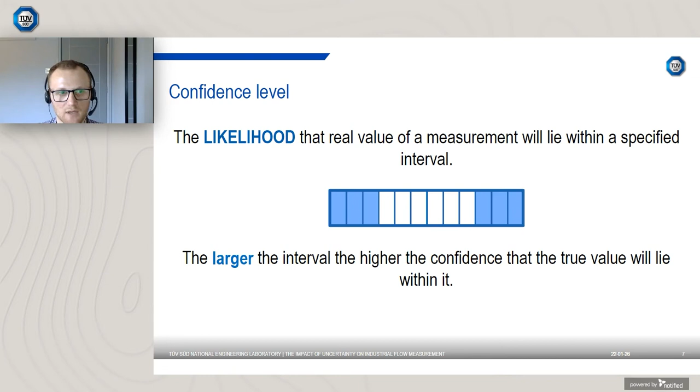So when you state a result, there are three things you must state. You must state the measured value, so that is the output — whether it be from your scale, stopwatch, or flow meter — the associated uncertainty alongside this, as well as the confidence level. So, as it says here, the result of a flow measurement may be stated as 3.5 plus or minus 0.2 litres per second at a 95% confidence level.

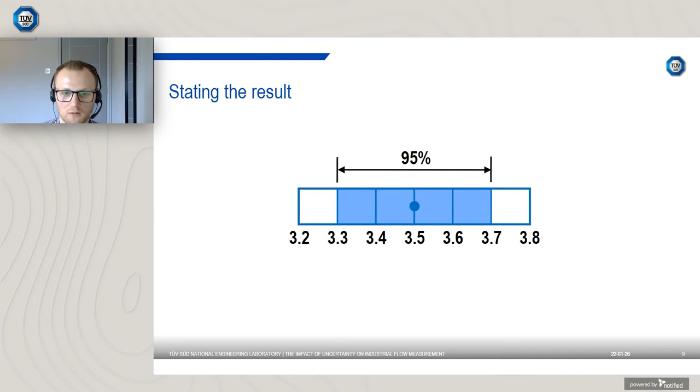So what does this mean in practice? Your measurement is 3.5, but based on the uncertainty, there's a 95% chance that the true value will lie between 3.3 and 3.7.

Error is another term that's commonly used, and this is the difference between the true value and the measured result. Because we don't know the true value, the error will be unknown. You do see error values stated from time to time, and this is when you're comparing a device under test to a very accurate reference instrument that is very close to the true value. So you're comparing a result to a value that is very close to the true value, and at times you can see error values stated in that sense.

Accuracy is another term that's used when dealing with uncertainty, and this is defined as the closeness of agreement between the result and the true value.

You can have an accurate measurement with a large uncertainty, so in a sense you can almost strike lucky with a particular measurement and be close to the true value. But importantly, you cannot attach a value to accuracy.

You can describe something as being highly accurate, very accurate, or compare two instruments and say this instrument is more accurate than the other. But when you start talking about values, that is an uncertainty, and you need to quote the appropriate confidence level with it. Accuracy is a qualitative term, not a quantitative term.

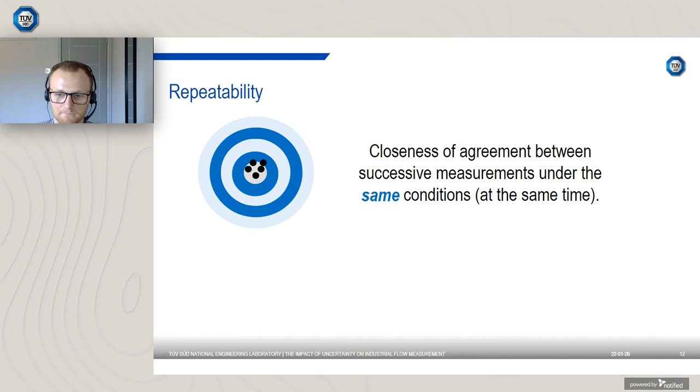If you have an accurate instrument, if you've got good accuracy, it ultimately means you've got good repeatability, because to be accurate, you need to be consistently close to the true value. So to be consistently close to the true value, you need to have a repeatable instrument.

If you have poor repeatability, you ultimately have poor accuracy. In a sense, you may strike lucky and be close to the true value with a measurement, but the poor repeatability of the instrument means you'll not always be close to the true value.

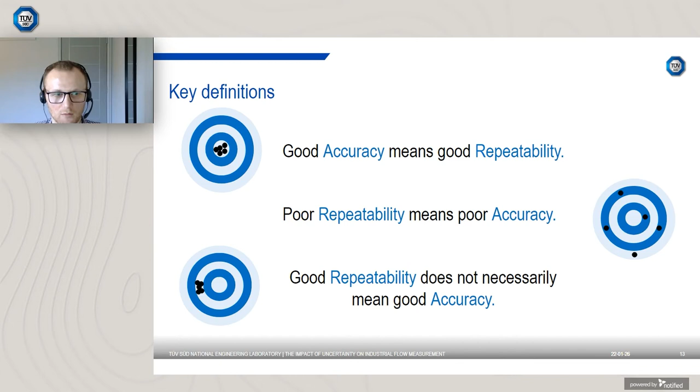And the final point: good repeatability does not necessarily mean you'll have good accuracy. You could have a lot of measurements gathered around the same point, but they may not be close to the true value.

Bias is another term commonly used, and this is when every measurement is affected in the same way. This could be, again, a flow meter which over or under reads by the same amount each time, or weigh scales over or under reading, and things such as that.

You can correct for bias, but you need to consider the uncertainty in your correction.

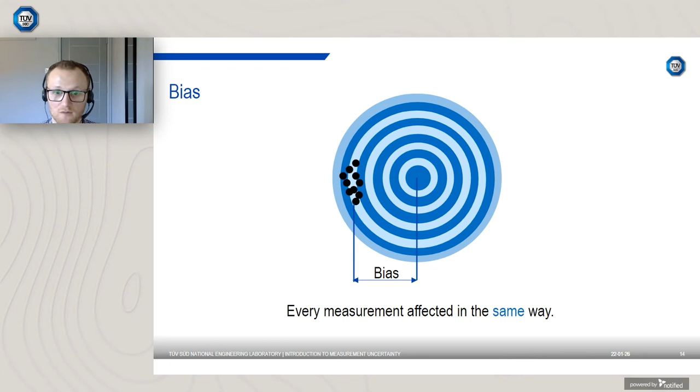Next will be the cost of errors, to emphasise why we care about uncertainty and why it's important in an industrial sense.

In 2019, there were an average of 81 million barrels of oil produced per day in the world at a total cost of 5.19 billion. If you assume an uncertainty of 0.25%, this leads to a financial exposure of £13 million per day.

This shows essentially why uncertainty in this sense is important. It's important that people have confidence in what they can pay for, as well as governments, to ensure that they're getting the appropriate tax revenues. So low uncertainty flow measurement in this case is very important.

A more practical example: if you look at petrol stations and refilling a car. If there's a 2% uncertainty on the flow meter at the petrol station and you have a 50-litre tank, your uncertainty in filling the tank would be 50 plus or minus 1 litre at a 95% confidence level.

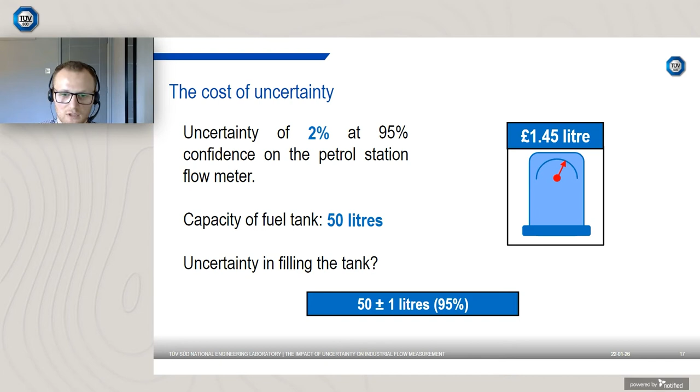If we consider £1.45 per litre and consider it financially, the cost of filling your tank would be £72.50 plus or minus £1.45 at a 95% confidence level.

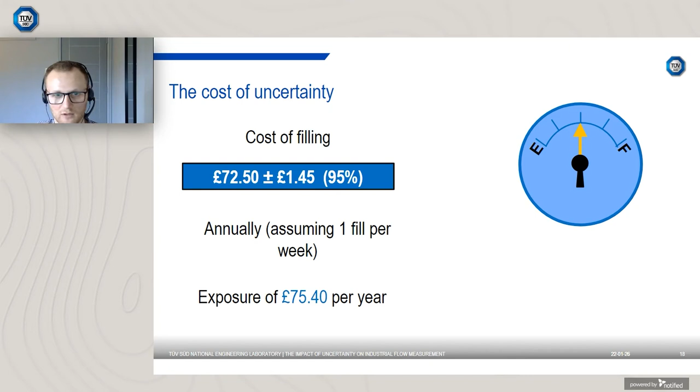If we take it a step further and assume you fill your car once per week, over the year you can be exposed to £75.40, either you the consumer, or the petrol station itself. And this is only with a 2% uncertainty. It is achievable, but you don't want to have 5-10% uncertainty on things like that, because that can really lead to exposures for the consumer.

So the next bit we'll talk about the types of uncertainty. I've quoted a few uncertainties and a number of examples, and in this section we'll really help us understand where we get the uncertainty values from, and then ultimately the final two sections will allow us to do some calculations of our own and understand where these values come from.

In terms of categories, they can be broadly defined into type A or type B in uncertainty analysis. Type A is using real data, so it's using statistical data and generating an uncertainty value via that data. Type B is generally non-statistical methods, so it may be from a manufacturer specification sheet, with manufacturing tolerances, or a calibration certificate where an uncertainty is quoted on it, or it may be just from judgment itself.

But first of all, we will look at type A uncertainties. So type A analysis is generally analysis of repeat measurements. When we repeat a measurement, it reduces the chance of errors, but repeats never agree. So subsequently, how do we decide which values to use, and what does the variation tell us?

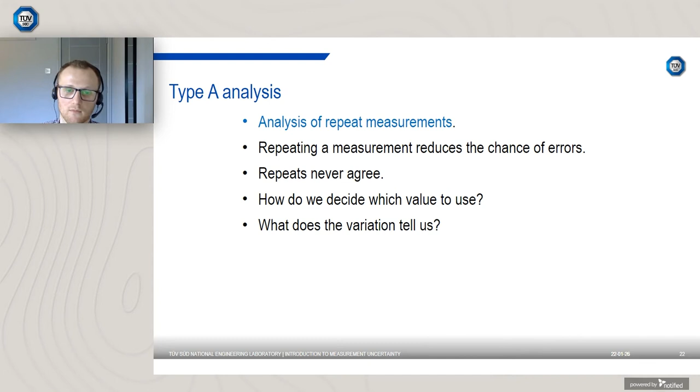Best estimate of a true value. If we want to get the best estimate of a true value and we have a number of points, the best estimate would be the average of all these points.

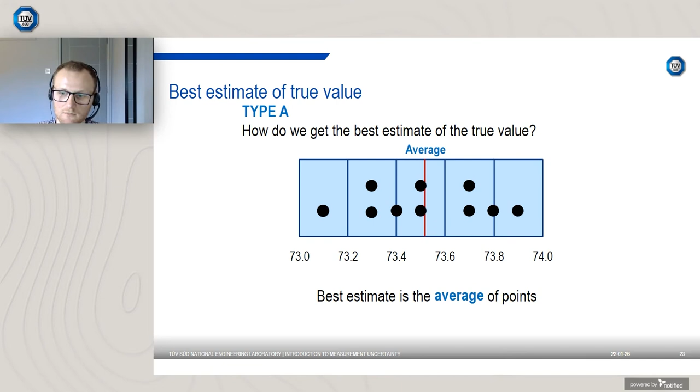But if we want to go a step further and determine how spread out the values are, we could use the range. You would subtract the lowest value from the highest value. But what this doesn't do is characterize what's going on in the middle, and it ignores 8 of the 10 data points.

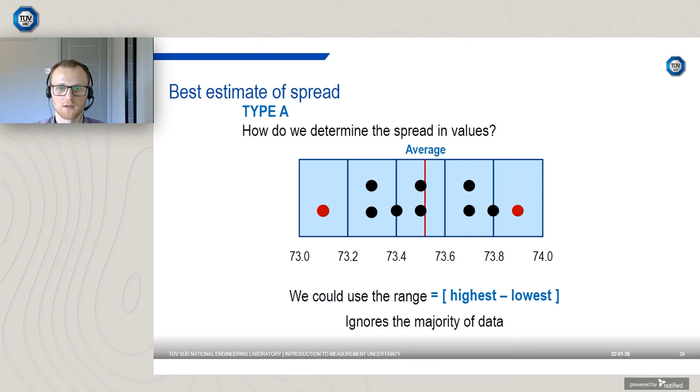So standard deviation is a measure of how essentially spread out the values are, and we can use an example to calculate a standard deviation. So if we have 10 readings for a flow of oil, shown below, we've got various readings between 73.1 and 73.9.

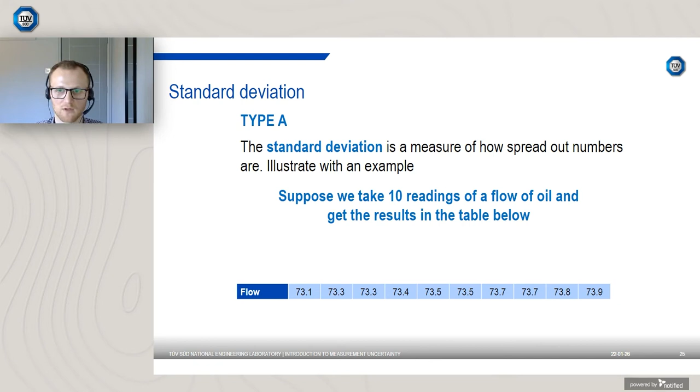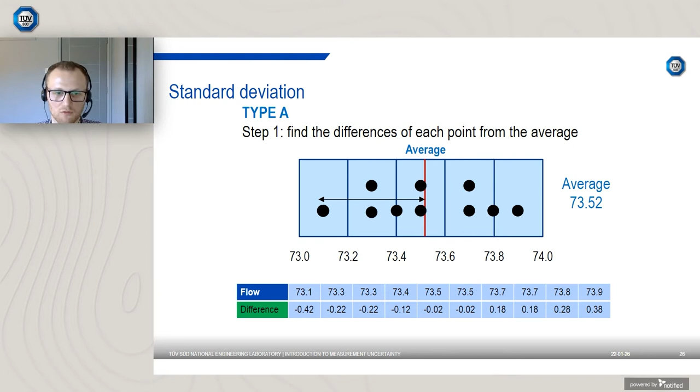Our first step in calculating the standard deviation is calculating the average of each of those points. And the average for each of those 10 points is 73.52. The next step is subtracting the average value from each of the 10 flow values, and this gives us a difference, 10 differences.

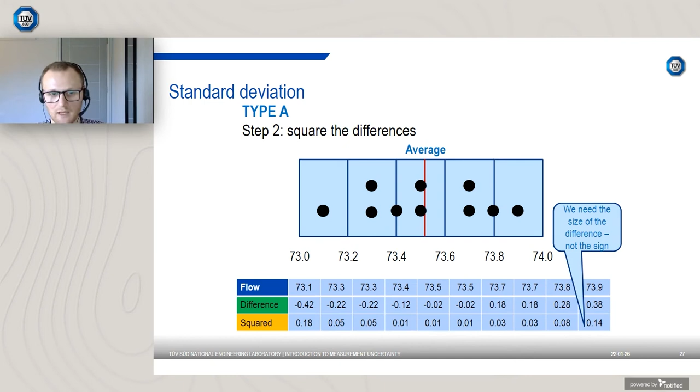We then square each of those values, so we have 10 squared values of the differences. And then we subsequently sum each of those 10 values together.

We then take an average of those 10 values, but in this instance we divide by 9 as opposed to 10, to get an answer of 0.064, and I'll go on to explain on the next slide why that is.

So we have an x bar, and we've set that as our average, and for each of the 10 values for xi, we've calculated the difference, we've squared the difference, we've added the 10 differences together, we've divided by n minus 1.

The reason we have divided by n minus 1 as opposed to n: if you divide by n, you're only calculating the standard deviation of that sample of 10. But what we are trying to do with our standard deviation is characterize what the spread would be in an infinite number of data points. And to do this, we divide by n minus 1.

This actually increases the standard deviation slightly. It accounts for the fact that we don't have the full population of data available to us, and errs on the side of caution by increasing the standard deviation slightly.

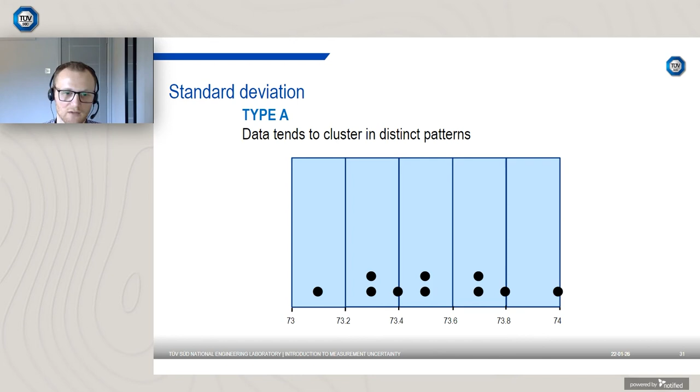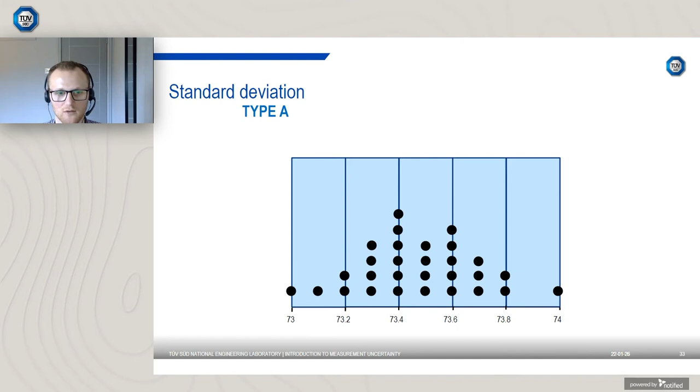So standard deviation - we've got 10 data points, but if we began to gather more data points, what you generally see for most things in nature and life, so if you think about people's weight, people's height, various other things, data tends to cluster in distinct patterns. And as you gather more data, you can see a pattern starting to emerge.

So you get this characteristic bell-shaped, or Gaussian, or normal distribution curve, where you can see that most points are centered around the average, and as you get to the extremes, the frequency of the readings decreases.

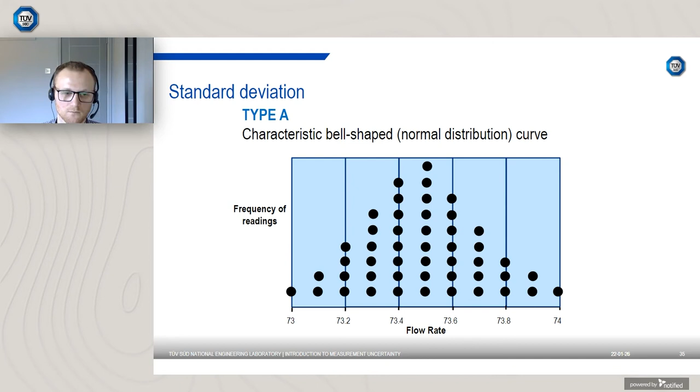So what does this tell us? The standard uncertainty, or small u, is equivalent to the standard deviation. So the likelihood of finding the true value in this interval is 68%, or 68.27% to be more accurate.

68% - this comes from a mathematical derivation from the cumulative distribution function, but I wouldn't concern yourself necessarily with why it ends up at 68. The previous calculation of 0.253 using the data set we had essentially characterizes that, if we had a full sample, an infinite sample of flow values, approximately 68% of the values would fall within this range.

Specifically, between 73.52 minus 0.253 up to 73.52 plus 0.253. If the values were more spread out in our sample of 10 flow rates, you would essentially see a flattening of the curve - it would be flatter with a smaller peak, and the standard deviation would be larger.

So essentially, the standard deviation for a normal distribution characterizes how tall or short or wide the shape of this normal distribution curve is. And that makes sense. If you've got a large standard deviation, the values are more spread out, and your curve is going to be flatter. Whereas if all the values are closely grouped around the average, you're going to have a taller peak, a lower standard deviation, and more of the values will be close to this peak.

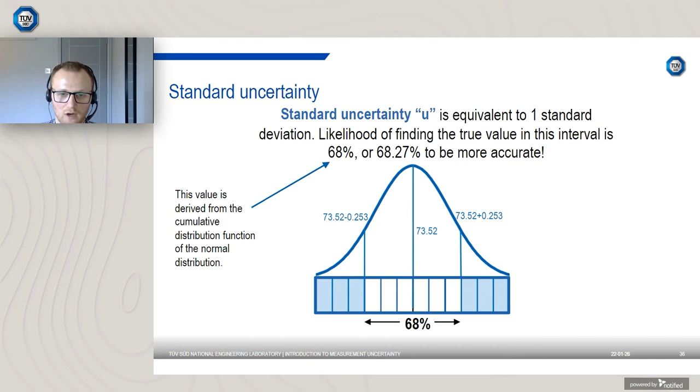So expanded uncertainty is a term that's used as opposed to standard uncertainty, and this is the uncertainty at a different confidence level. Our standard uncertainty is at a 68% confidence level, so we have 68% confidence that the true value will lie within plus or minus 1 standard deviation. But if we want more confidence that the true value will lie within the interval, you need to multiply the standard deviation of 0.253 by 1.96, and this increases our confidence level to 95%.

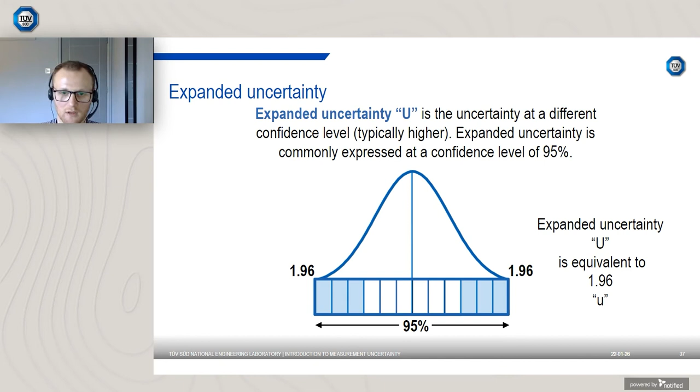And this is illustrated here. So we've got our 68% confidence level at a coverage factor of 1. If we want to increase the confidence that the true value will lie within here, we essentially multiply by the appropriate coverage factor, and that widens the uncertainty bands, and you can see it's collecting more data. There's more data within the two coloured lines, and essentially it's increasing our confidence that the true value will be within there.

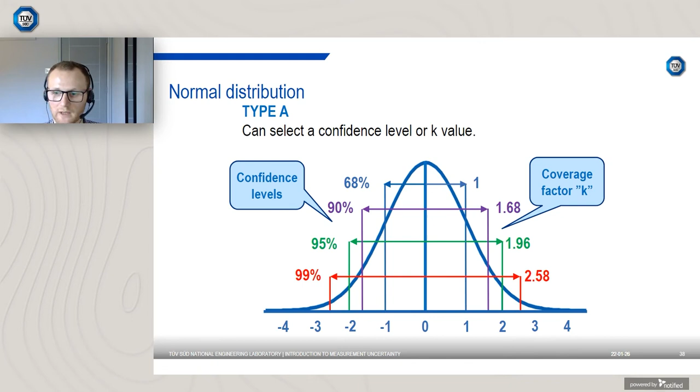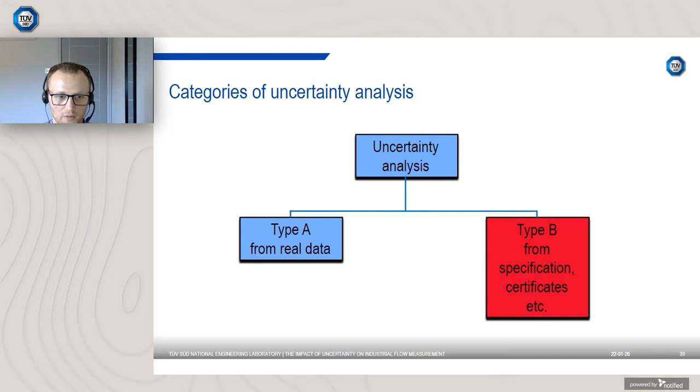So we've talked about type A, generally around statistical analysis of a number of points, getting our standard deviation, and then subsequently our standard uncertainty based on that. Sometimes we don't have a wealth of data available to us, and this is actually quite common. So this is where type B comes in. So what do we do?

As it says here, not all uncertainty comes from type A analysis, and often you need to assess uncertainty from other sources. That may be using your own judgment. You might know that the true value will lie between two values. There may be manufacturer's data, so they may quote that something is manufactured to a given tolerance, so it will be between two values. You may have an item calibrated somewhere else, such as reference temperature or pressure instrumentation, and it's come with a certificate saying the uncertainty is X at a confidence level of Y. You're essentially just taking the uncertainty information that you have been given and applying it.

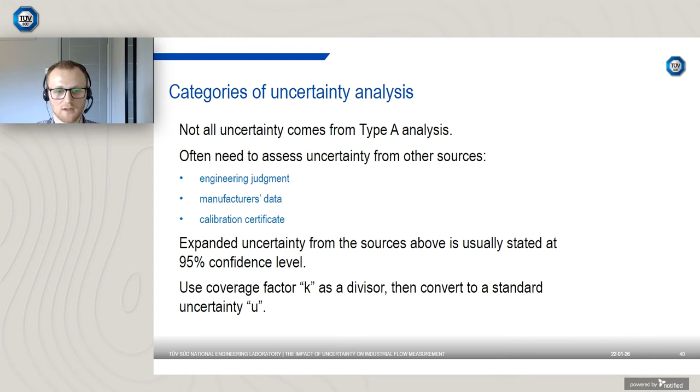As it says here, expanded uncertainty from the sources above is usually stated at a 95% confidence level. So if you use the coverage factor k as a divisor, you can convert back to a standard uncertainty. This is essentially just the reverse process of what we did before with increasing the confidence level. If you want to take it back to a standard uncertainty, you know what your coverage factor or confidence level is, and you divide by the appropriate factor.

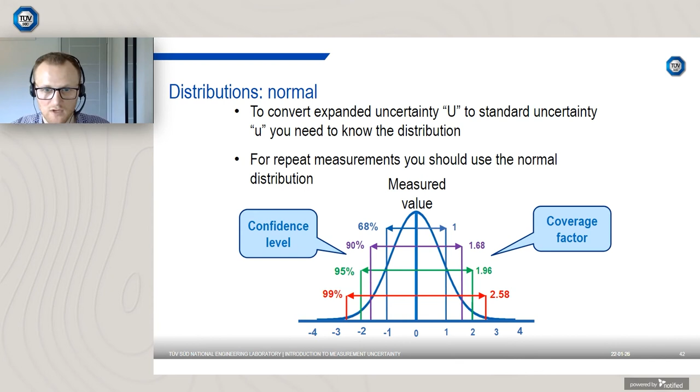And this is shown here for a normal distribution. To convert from expanded to standard uncertainty, you need to know the distribution. If you know generally it's from repeat measurements, but you don't have the repeat measurements, you tend to use a normal distribution. It may be quoted at 95%, so you may have a calibration certificate stating that the calibration uncertainty is X at a confidence level of 95%. So to get it back to a standard uncertainty, you would divide by 1.96.

So you may get a coverage factor, k, given in a calibration certificate. You may get a confidence level, and subsequently you can look up k from a lookup table. There's plenty available online, and even Excel has a function for the various lookup values.

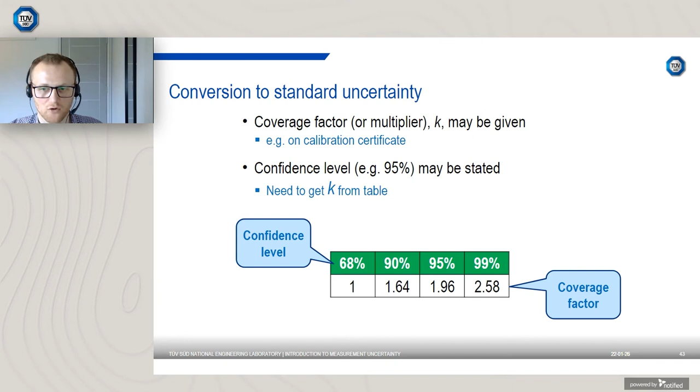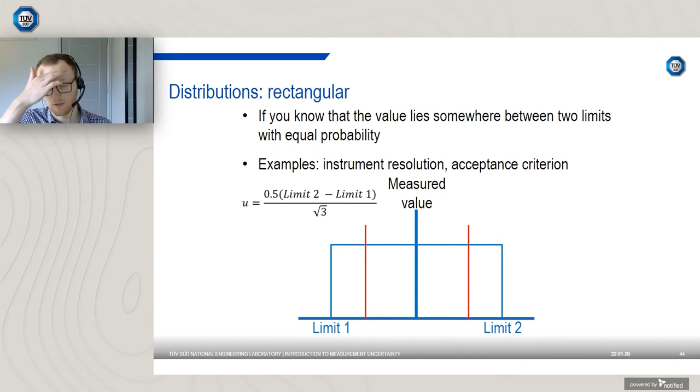So an example of this could be a flow meter itself. If you look at a flow meter which reads 35, so if you look at resolution uncertainty, really that value, if the value the meter was sensing was between 34.5 and 35.5, it will read 35 irrespective of what the meter is actually sensing. So there is a resolution uncertainty there.

So to get the standard uncertainty, we would apply the equation. It's 0.5 multiplied by the difference in limits, limit 2 minus limit 1, so that's 35.5 minus 34.5, divided by root 3, and that gives a standard uncertainty of 0.29.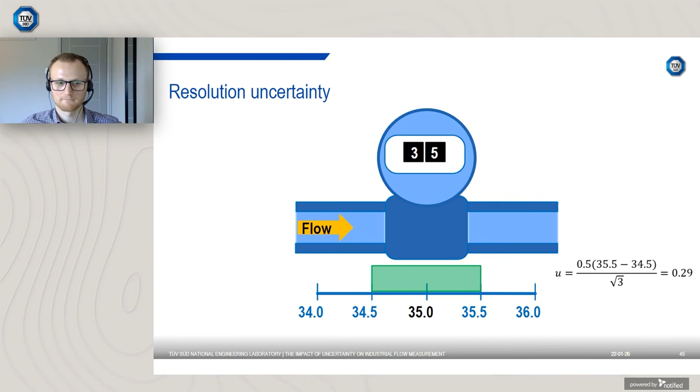So there can be instances where you would want to reduce the resolution uncertainty, and the obvious answer here is increase the resolution of your meter, or the readout from the meter. And this essentially would decrease your uncertainty in the resolution. So instead of being anywhere between 34.5 and 35.5, the value being sensed by the meter can be anywhere between 35.05 and 34.95. And by doing this essentially reduces our uncertainty by a factor of 10.

So this just illustrates that not everything is normal distribution, and you have to consider how you'd expect the data to cluster and what the probability is for various uncertainties.

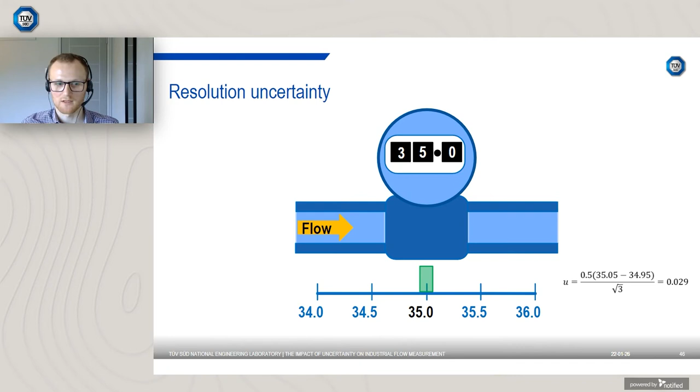So now we can begin to look at the calculation stages involved in developing an uncertainty calculation, and this is something we do often with our various facilities, and I'll go through each stage that we go through.

So first of all, is identify uncertainty sources. So if we have, in a sense, a flow rate, but it could be an average temperature or an average pressure or density, you need to identify all of the uncertainty sources that feed into that. So first of all, if you are using an equation to calculate any parameter, you need to look at all of the uncertainties in each parameter of the equation.

Are you taking repeat measurements of that? So will there be an uncertainty in the mean? And this is by no means easy. Identifying uncertainty sources doesn't require any knowledge of uncertainty itself, it requires more of a knowledge of the process itself to identify the uncertainty sources. So you could be very experienced in uncertainty analysis of various things, but if you don't understand the physical, chemical process, identifying the uncertainty sources is difficult. So it does really rely on someone having knowledge of the process.

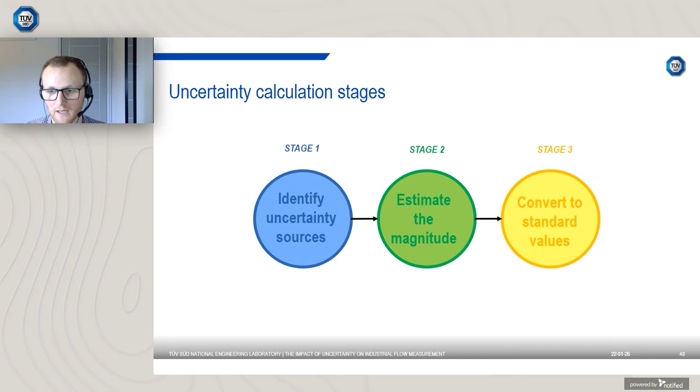From there, you would convert to standard values. Generally, if you're doing type A analysis, you've calculated your standard uncertainty in the first place, but for type B analysis, where it may be a rectangular distribution, you may need to divide by half of the difference in the limits divided by root 3. You may be quoted a coverage factor of 2, or a confidence level of 95% for a normal distribution. And you need to use that information to convert from an expanded uncertainty back to a standard uncertainty for these parameters.

The next stage is calculating the sensitivity coefficient, and this is essentially looking at how sensitive your output parameter is to the uncertainty parameter you're considering. So there are various methods for this. The first is if you have an equation to calculate something, you could partially differentiate the output parameter with respect to the input parameter.

But this can get a bit complex with more complex equations, and normally a numerical method is used where you can do a small increment, typically a standard uncertainty, increase to the input parameter and see the change it has to the output parameter. And similarly, you can decrement the input parameter and see what change it has to the output parameter, and then you can calculate a sensitivity coefficient.

You then convert your standard uncertainty to an output value, and this is simply you multiply the standard uncertainty by the calculated sensitivity coefficient.

Stage 6 is something we'll touch on at the end, and this is estimating a degree of correlation. This is around the fact that sometimes you may have measurements that are not necessarily independent of one another. You may have two temperature measurements in a process, and both of these temperature probes have been calibrated against the same reference. This needs to be considered because if the temperature is out one way with the calibration, it's going to be out the same, or likely to be out the same, for both parameters, and this needs to be considered. It's quite important for more complex processes.

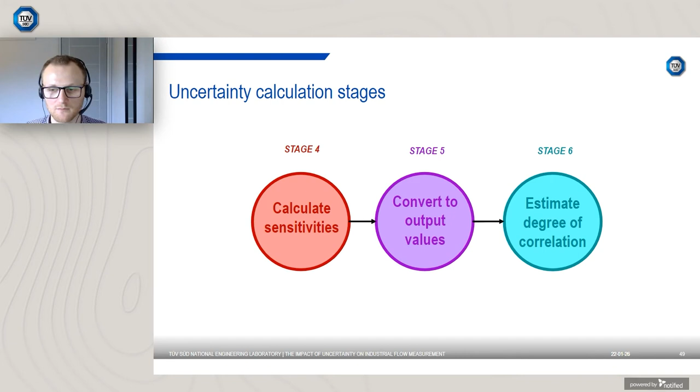Depending on whether it's correlated or uncorrelated, most of the examples here will just be on uncorrelated methods. You combine using the appropriate method, and the method used for uncorrelated is the root sum squared method. We'll go into this in a few examples.

Finally, you express at the appropriate confidence level, so everything has been converted to a standard uncertainty. Once you've combined using the appropriate method, you will have your standard uncertainty. If you want to express your final uncertainty value at a confidence level of 95% or 99%, you need to use the appropriate multiplication factor to get back to that.

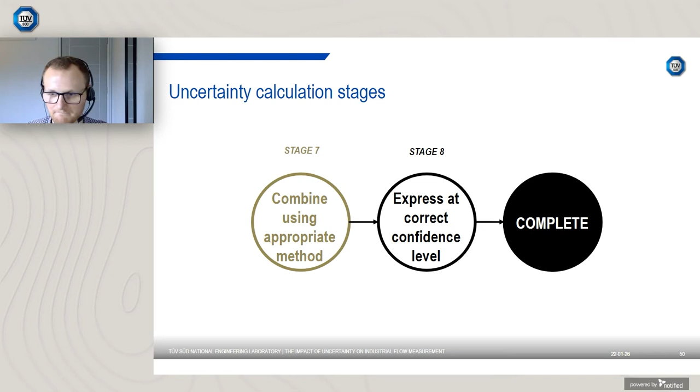So we can now look at a few examples. I appreciate it might have been a bit heavy in terms of technical material in the last few slides, but the purpose of these is just to tie everything together and understand how everything feeds into an uncertainty calculation to get a final output for uncertainty.

If you take the example of an orifice plate, a differential pressure device, a flow measurement device, to calculate mass flow rate - in the box below we've got our mass flow rate Q, and we have an equation derived that calculates the mass flow rate, with a number of parameters. We have the discharge coefficient, which accounts for frictional effects, beta, which is the ratio of the orifice diameter to the pipe diameter, expansibility factor epsilon, the pressure differential calculated from the U-tube manometer difference in height, and also the density of the fluid. So we have a number of parameters, all of which will have uncertainties, and we want to calculate what the uncertainty is in the mass flow rate.

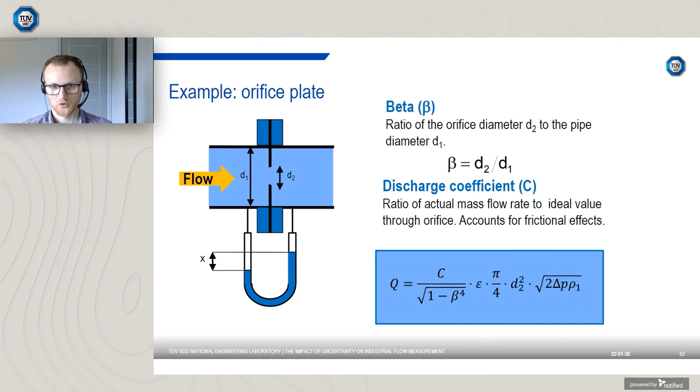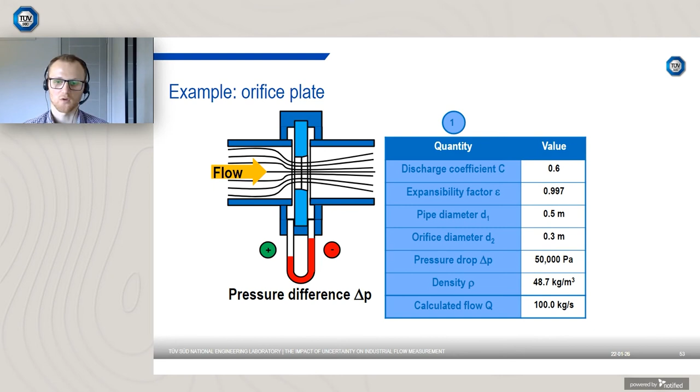So how would you do this? If we think about the steps we spoke about previously, we've got our values for each of these - these aren't their uncertainty values, these are the absolute values for them. So we've got our value for discharge coefficient, expansibility factor, both the pipe and orifice diameter, the pressure drop, and the density. So you can calculate the flow rate, which perfectly works out at 100 kilograms per second based on these values. So identifying all the parameters and identifying the uncertainty in all the parameters is relatively simple here - you've got your equation, you know what your parameters are, and we can take it from there.

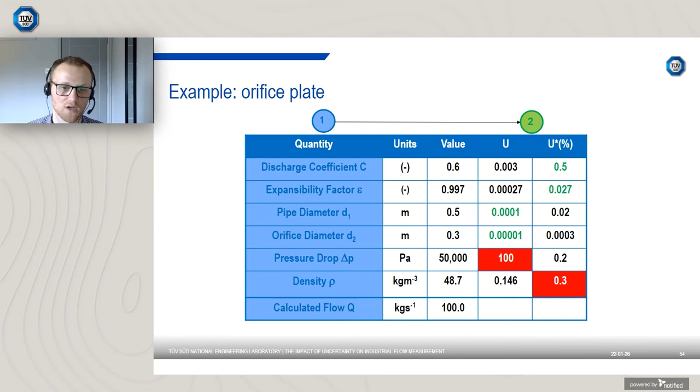But now we take it to the next phase, and stage 3 is getting it into standard uncertainty. So what we need to consider now is our distributions. For the discharge coefficient, expansibility factor, pressure drop and density, we're assuming that these are normally distributed around the mean at a coverage factor of 2. So based on this, we would divide by 2 to get our standard uncertainty.

For the pipe diameters, if these are from manufacturing specifications and the manufacturer quotes tolerance levels, it's essentially saying the value can be 0.0001 above or 0.0001 below 0.5 for the pipe diameter. Because it is a tolerance level, you err on the side of caution and say it can be anywhere within these tolerance levels, and by doing that you assume a rectangular distribution.

1.73 is the same as root 3. So if you divide by that, that gives you a standard uncertainty. That's conservative because you're dividing by a smaller value, and subsequently your standard uncertainty will be greater. The reason this is greater is because you've got less certainty in where it will lie within the distribution, since it's a rectangular distribution. For normal distributions, you've got a greater certainty that it will lie closer to the mean as opposed to the extremes.

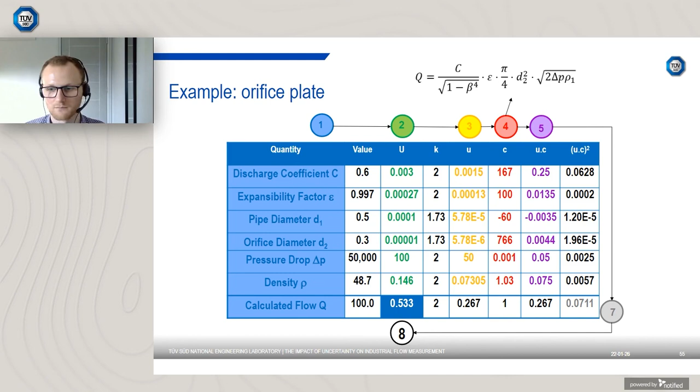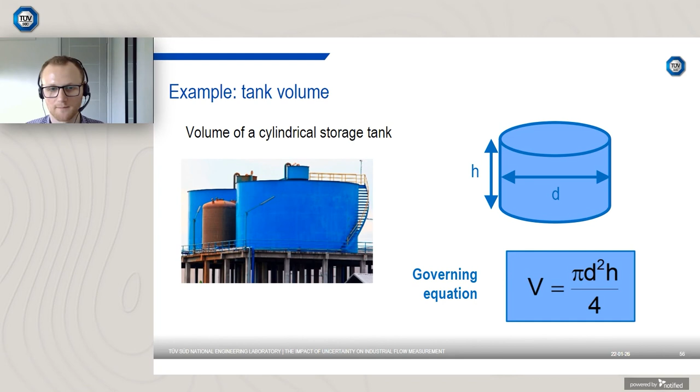Another example is tank volume. If you take the volume of a storage tank, it's a relatively simple equation, pi d squared h over 4. There's a bit of additional complexity in that you need to calculate a standard volume based on a temperature of 15 degrees. You may be measuring the tank in winter or summer, and temperature fluctuations mean the tank can change size. So if you use a coefficient of thermal expansion, you can standardize the volume of the tank to 15 degrees C by recognizing the temperature at which you took your measurements of height and diameter.

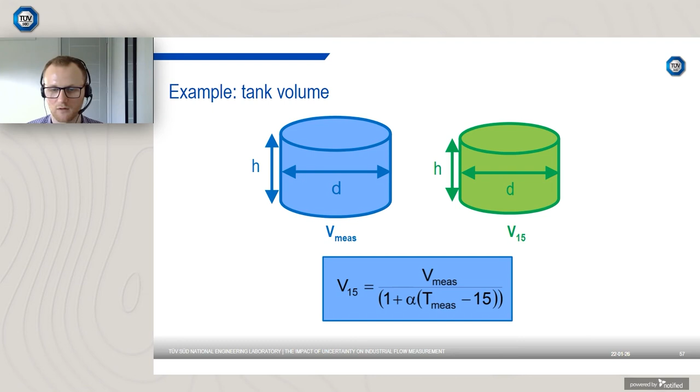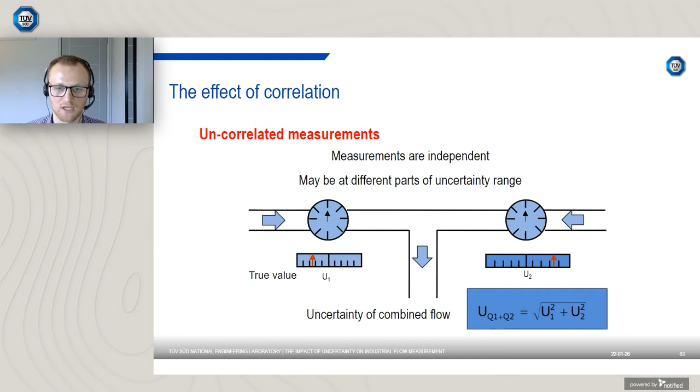This is the reason or root of where the root sum squared method comes from, because if you have lots of values feeding into one another, it's very unlikely that they're all going to be overreading or underreading if they are uncorrelated. So the uncertainty of the combined flow can use the root sum square method: uncertainty in 1 squared plus uncertainty in 2 squared, and you take the square root of that. This takes credit for the fact that if you have a large number of independent measurements, the likelihood of having them all on the same side of the uncertainty bands is small.

But if we now look at correlated measurements, if both measurements are made by one meter, if the meter underreads for one reading, it will underread for them all. So it's going to be on the same side of the distribution for both. We can't take credit for the fact that these measurements aren't independent—they are correlated and dependent on one another, and if the meter is out one way, it's going to be out the same way for both. So typically, the simplistic case is adding the uncertainty terms together simply, as opposed to squaring each uncertainty term, adding them together, and taking the square root.

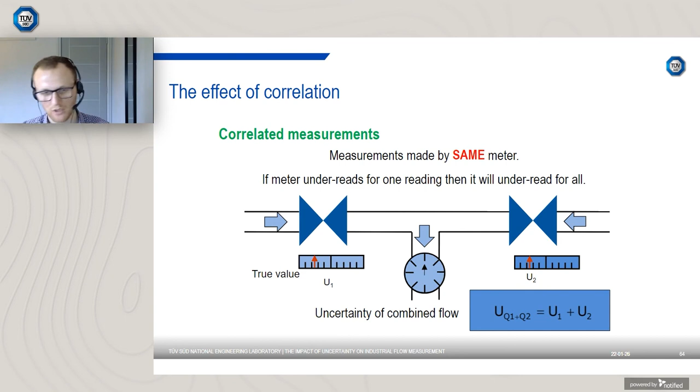We can look at this if we go back to our tank volume example. If we assume that the instrument used to measure the diameter and the instrument to measure the height were calibrated against the same reference, and that reference meter is out one way or the other, it's almost certain that the uncertainty in calibration for diameter and height are correlated, and they're going to be out the same way. So using the root sum square method isn't appropriate in this case.

In a sense, what we do is simplistically add the UC terms together. So you would have 0.955 plus 0.905, and then you would square them. Then you continue with the rest of your process, because the rest of your values you're still determining as uncorrelated, and you get down to your sum of UC squared of 4.277. You take the square root of that, get your appropriate coverage factor, and that leaves an expanded uncertainty of 4.136, when it was previously 3.188 when you assumed it was uncorrelated. So this is just a small example to really consider correlation.

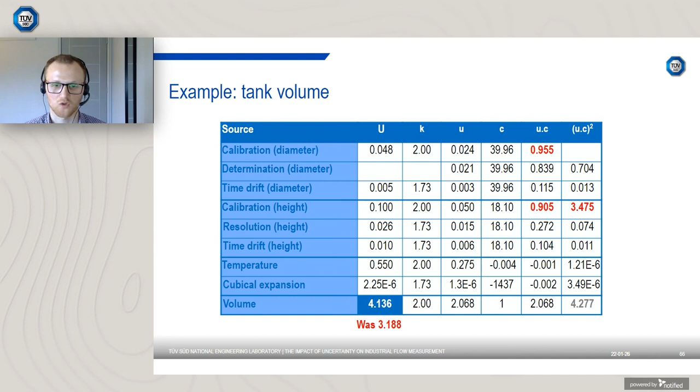So just a summary on handling uncertainty calculations. First of all, always convert to a standard uncertainty before performing calculations. Determine your appropriate distribution, see what the coverage factor or confidence level is. Ensure that your units are all identical—in our case, for example, in the orifice plate example, everything was in SI units, so everything was in the correct units. Be conservative, and in a sense, always round up. The last point goes back to understanding not only uncertainty, but understanding the process itself, and whether what you have calculated or estimated feels right based on your knowledge of the process.

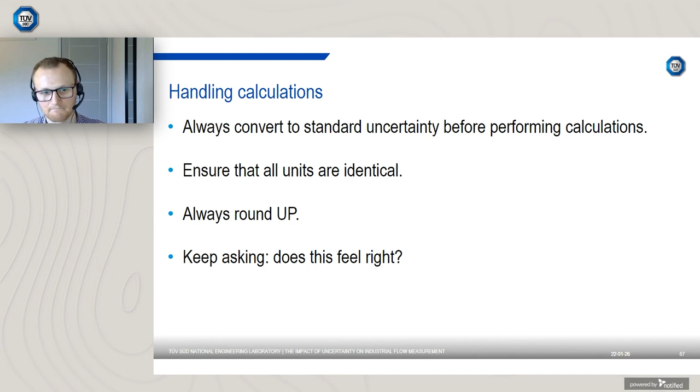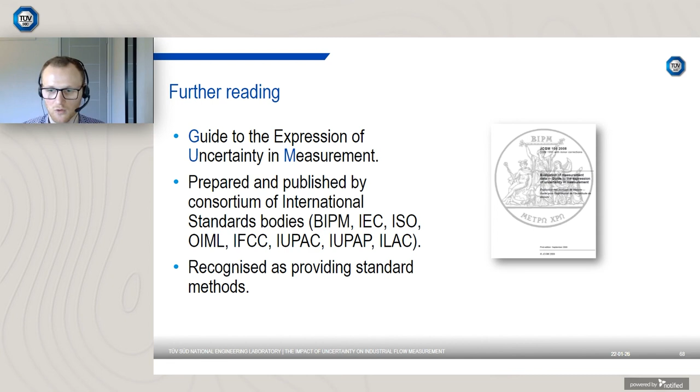And just to summarise, measurement is meaningless without a statement on uncertainty and associated confidence level. Your final uncertainty describes the quality of your measurement. If you've got a low uncertainty and demonstrated that, it tells you you've got a high quality measurement, and in some instances you do need to demonstrate that.

Assessment of uncertainty can be time consuming and requires careful thought. No uncertainty analysis is ever perfect. It's very difficult to identify every source of uncertainty, particularly in complex facilities and processes. And it does take time to understand the process, the uncertainty calculation, etc. But if it's done right, it will save time and money in the long term.

Going back to that point about no uncertainty analysis being perfect, this is the reason why measurement institutes across the world do intercomparison studies, where they take some form of transfer standard and move it between different labs across the world. So if various labs are claiming a certain uncertainty, the results for the transfer package should match up. If every uncertainty analysis ever carried out was perfect and we had all the information, there would never be a need for intercomparison studies. But doing things like intercomparison studies is a further method of confirming the uncertainty budgets that have been predicted.